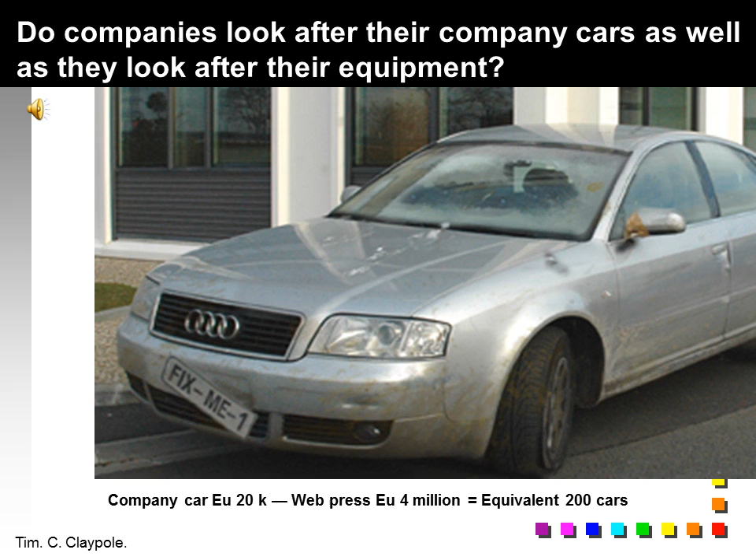This presentation talks about maintenance. Maintenance is an essential thing in terms of achieving productivity in the workplace.

If you look at this mocked up picture of a company car, if you get a company car when you graduate and it's in this condition, it's pretty obvious that you're not doing any maintenance. So what about the equipment? It's not so obvious a lot of the time. In fact, a lot of the Japanese philosophies say the first thing that you do is clean the equipment so you can see the faults. Why is it surprising? A company car is only 20k, whereas a web press or a big piece of capital plant can be millions.

Throughout this presentation, the examples will tend to be drawn from the printing industry. The reason for that is we were commissioned a couple of years ago to do a survey of maintenance in small businesses and large businesses involved in the printing industry.

So why should you want to maintain? Well, you want to maintain because you want things to be available and you want things to be reliable. If your car was badly maintained, you'd have a trauma every time you wanted to start the car on a cold winter's morning.

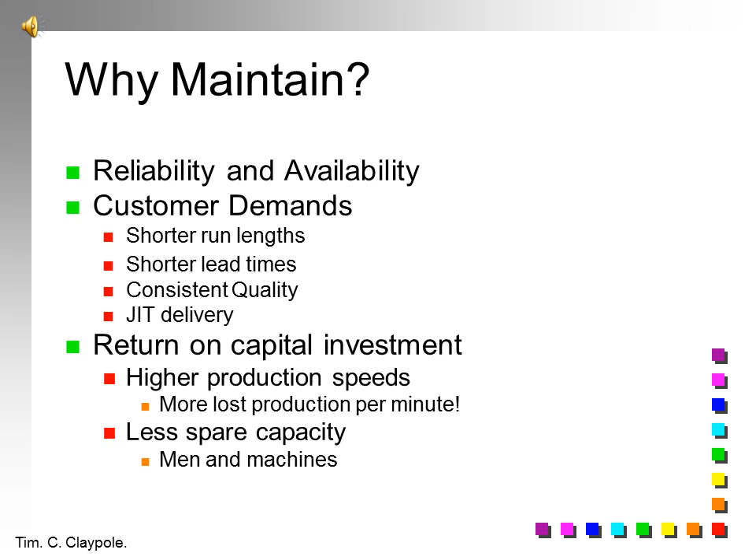Without a maintenance strategy, companies go into the spiral of breakdown despair. They lose production because of breakdowns and because they can't run their equipment as fast as they would have designed to run it. So because of that, they're not meeting customer deadlines.

So they have to run their equipment harder to recover lost time. By running it harder doesn't mean they're running it faster, they've got to run it for longer hours. Because it's still not being maintained, you move to position 3 on the spiral of despair, where breakdowns increase because the thing isn't being maintained, and more time is lost.

Because more time is lost, we've lost more productivity, we've lost more production, there is more pressure to get the jobs out, and we spiral down in step 4 to a point where there is less time available for maintenance. Ultimately, the plant will spiral down to a point at which it doesn't work at all and the whole production ceases.

If you're in the position where you have a car that you need every day, and because you need it every day you haven't got time to maintain it, eventually you reach the point where your car is unavailable because it breaks down catastrophically.

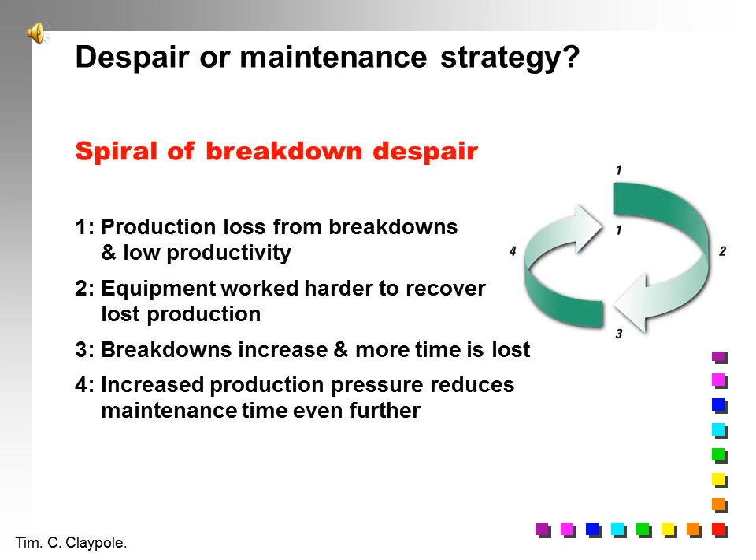How important is maintenance? A survey a few years ago estimated that the total cost of maintenance in the EU approached 5% of the total manufacturing turnover. That's equivalent to the total annual industrial output of Holland. It's a big and important aspect of engineering.

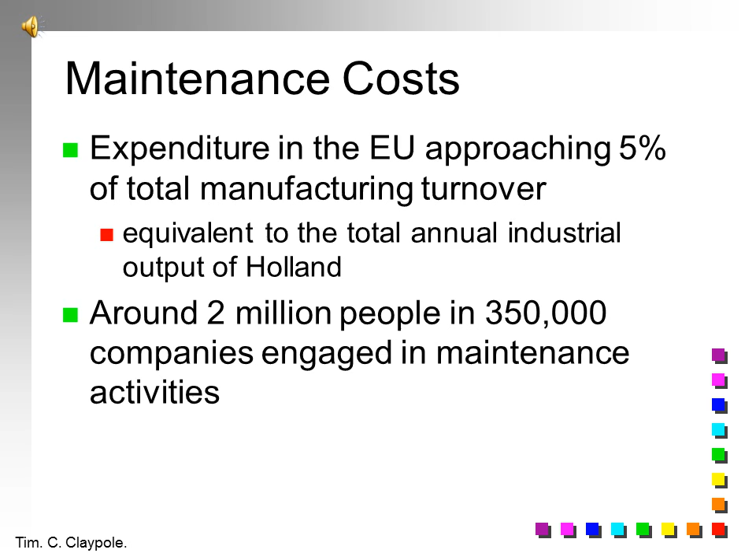There are around 2 million people in 350,000 companies engaged in maintenance activities. But as we'll see from the study that we'll show later, they do not necessarily class themselves as being in maintenance. It is just one of the tasks that they do.

We spend a lot of time teaching you how to design properly, but 70% of diesel engine failures are due to contamination, and 50% are due to wear and wear-related issues, i.e. not maintaining your equipment properly.

40% of rolling element bearings fail because they use the wrong lubricant. Only 10% fail because they got the design wrong. So we're looking at an issue which has a big impact on the things that you will be designing.

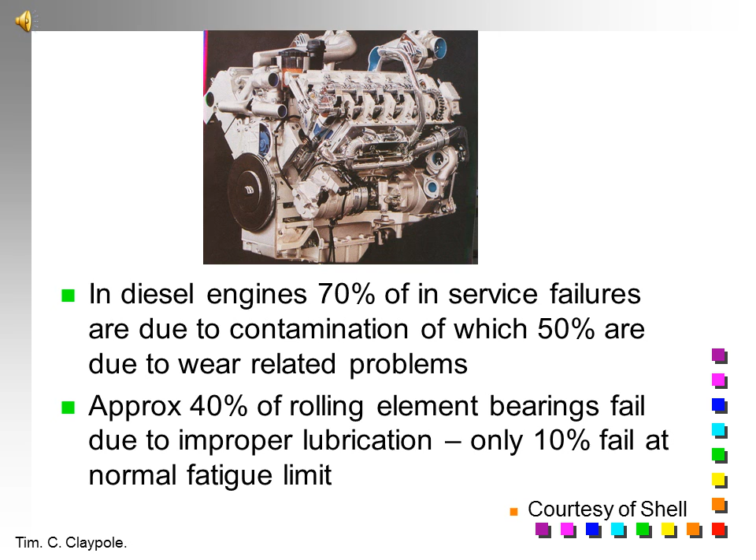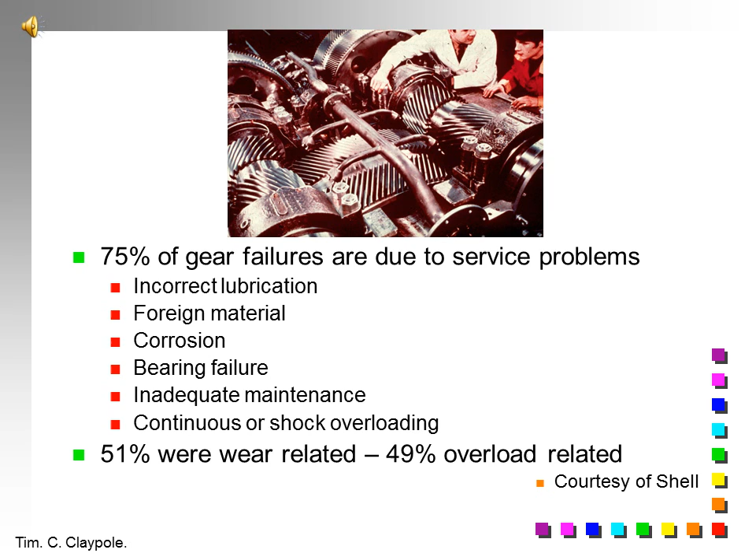If you look at gearboxes, 75% of gear failures are due to service problems. And if you look at the first 5 of these, incorrect lubrication, foreign materials, these are maintenance issues and not monitoring the performance of the gearbox. So in fact 51% of the failures are related to wear and 49% are related to overloading. So the big problem is not that we overload the gearbox, but we don't maintain it properly.

Of course, one of the interesting things is, what is a failure? A failure is different things to different people. One man's failure is another man's inconvenience.

If a gearbox operating in a continuous process plant production line fails or shows signs of failing, if the safety office are involved, they would call for an immediate shutdown because the plant isn't working perfectly. If the production manager is involved, he's being pressurised by the people in sales saying, you've got to get this production out, and by the senior management, he'll say, it's still running, let's leave it run, and we can inspect it the next time we have a shutdown.

The sensible way of doing it, if you have somebody who's looking at the maintenance issues, is you stop the gearbox, you stop the production line, you inspect to see what's happening, and then you monitor to see if it gets worse. And then on the basis of the inspection and the monitoring, decide when it's going to be dealt with.

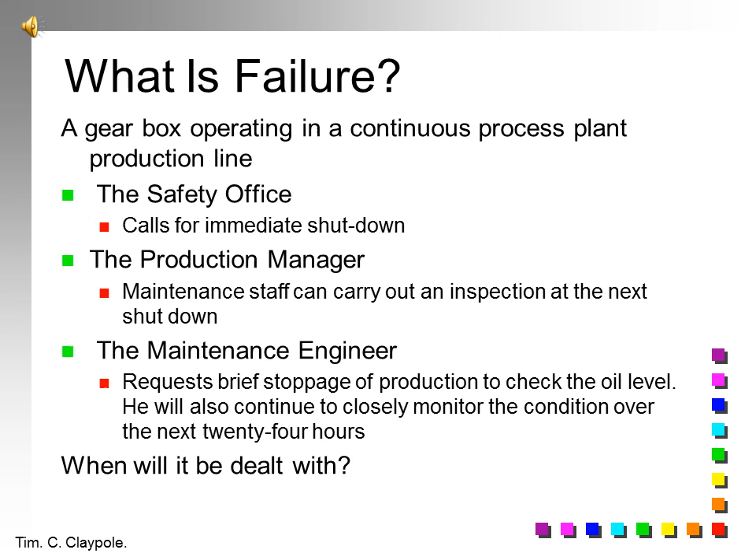The history of maintenance very much parallels what goes on in the National Health Service. In the 1930s, we used to have breakdown maintenance. If you had a heart attack, then they'd try and recover it after the event. If you had something go wrong with you, you'd end up having surgery.

In the 1950s, people started thinking about preventative maintenance. In terms of the heart, preventative maintenance could be having bypass surgery so that you have a good blood flow to the heart muscles so that you don't have the heart attack. This is the same as periodic component replacement.

In the 1970s, you started to look at predictive maintenance. We're now starting to look at disease detection. Is something going wrong ahead of time? Monitoring blood pressure on a regular basis, for example. This is condition monitoring, identifying that something is failing and fixing it before it fails catastrophically.

Finally, in the 1980s, we get proactive. You start looking at cholesterol and blood pressure monitoring, the root cause being diet and diet control, so people start looking at what they eat. A tremendous amount of studies are published all the time about what things are good for you and what things are not good for you. This is the same as performance monitoring, contamination control, total productive maintenance.

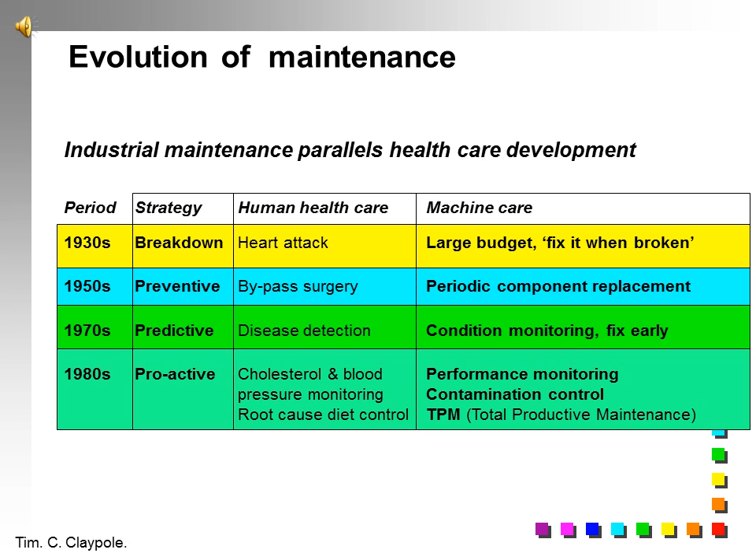What are the maintenance strategies we have available to us? The first and most basic is breakdown maintenance. Breakdown maintenance is we let the plant run, and when it breaks down we fix it.

The second strategy is restorative. This used to be very popular. Once a year or once every 6 months, the equipment is taken out of service and is completely restored to as-new conditions.

The other maintenance strategy is preventative maintenance. You change something ahead of time before you know it's going to fail. A lot of effort's been put into that area to predict failures and therefore be able to estimate when you need to change things. The most common example you'll find of preventative maintenance is changing the oil and the oil filter in your car.

We'll then move on to condition monitoring. Condition monitoring looks at measuring the performance of the item and looking at how that is changing. Formula One do it all the time. They are effectively doing condition monitoring on their car all the time it goes around the circuit. Not every company's got the same budget as a Formula One racing team, but it's still an important way of ensuring you get high availability.

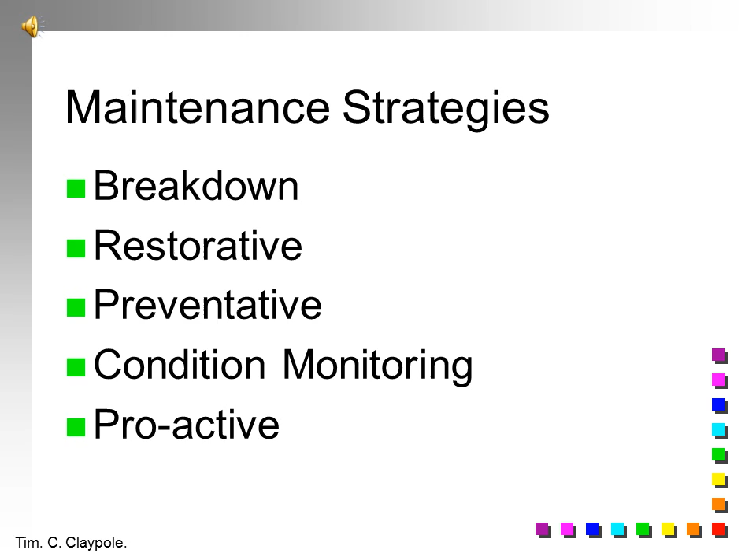And the final maintenance strategy is proactive. Now I'm going to go through these in a bit more detail.

But first, how do you decide what strategy you should adopt? Well, it depends on how long you expect the components to last and how long you expect the plant to last. It depends on what effect the failure will have on the process. Will it cause the process to stop completely? It also depends on whether it's detectable. Are you aware before it's too late that the process has failed?

A good example is car brakes. You need to know the car brakes have failed before you put your foot on the brake, not when you put your foot on the brake.

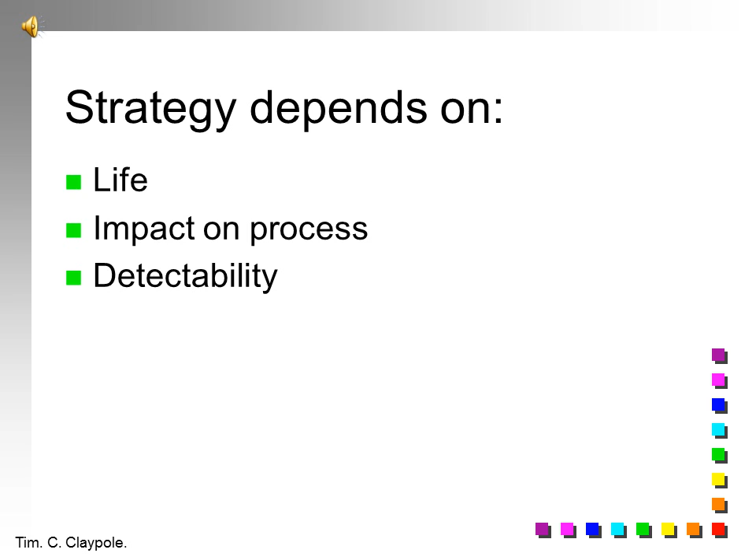So what are failure consequences? What are hidden failures? Hidden failures are failures that are not apparent to the operator. Think again of the car brake. If the car brake fails, it's not immediately apparent. You could belt down the motorway at 100 kilometres an hour, 70 miles an hour, and be totally unaware that your brakes are not going to work. So that's a hidden failure.

The first time you become aware of the failure is when you come to the end of the motorway and you can't stop.

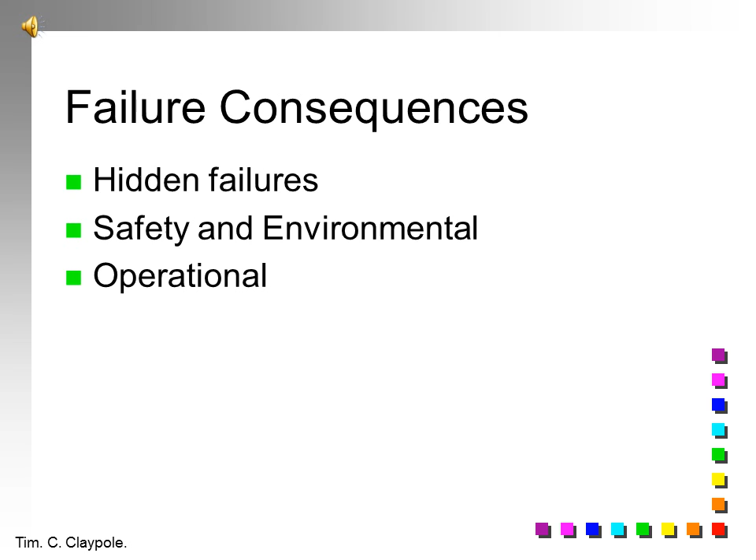What about safety and environmental consequences? So hidden failures are things that the operator can't see. What about safety and environmental? Well, if something fails, does it make the system unsafe? Or in today's climate, does it cause you to have an environmental problem, discharging some smelly liquid into a site of special scientific interest? And finally, the economic one, operationally.

So it hasn't actually caused any harm. But because it's not working, you're exposed to the risk that if there is a fire, you won't be made aware of it. So in itself it's harmless. It doesn't matter to you whether the fire alarm works or not, because it doesn't affect your day-to-day living. But it leaves you exposed to a catastrophic fire where you don't detect it. In which case, you've got to eliminate the risk.

You eliminate the risk with a fire alarm by pressing the button on the detector to make sure that the battery is okay. You blow candle smoke into it to make sure it sounds off, or you burn the toast, which has much the same effect.

What if the failure is hidden and doesn't have a consequence? Then you've got to ask, what on earth is that piece of equipment there for anyway? It might seem a statement of the obvious, but it happens quite often in industrial plants. They rebuild the plant, they redesign the system, and they leave old bits in place which are still working, but they don't actually affect anything. So you actually have to look at it and think, well, if it's not having any effect on the process and it doesn't affect safety or anything like that, why in fact have we still got this piece of equipment?

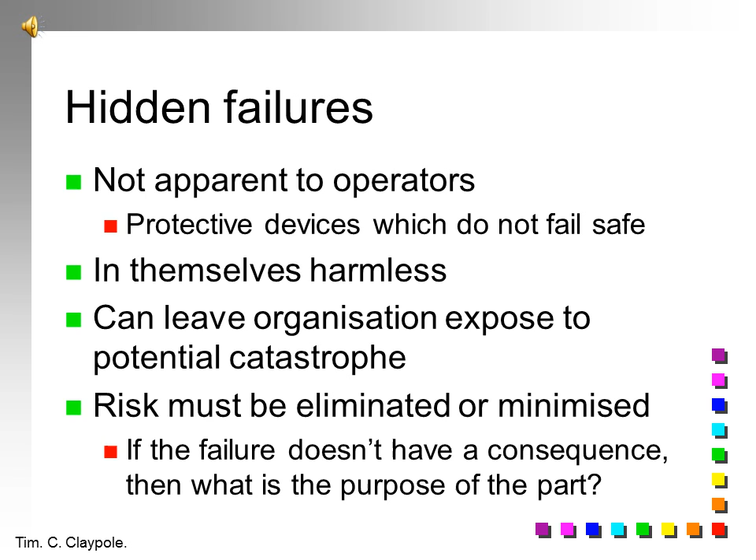Safety and environment are the most important. If we had the failure, does it kill someone? Will it cause a serious injury? Will it let something that damages the environment? If the answer to either of those questions is yes, then you cannot risk having that type of failure. You've got to look at the design, redesign the process, and eliminate it or minimize the risk.

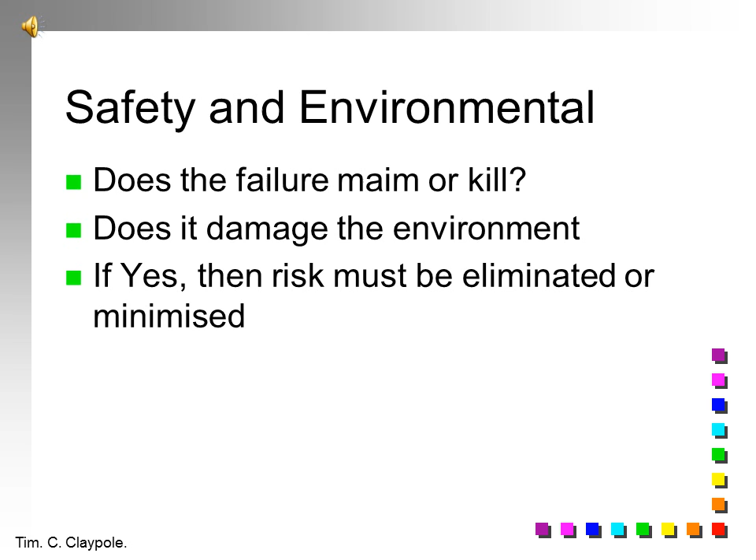A lot of the time, though, we're dealing with maintenance and we're looking at the operational consequences. What maintenance strategy we're going to adopt depends on how it impacts on the productivity and the ability of the company to make money. The economic decision is made by, does it reduce the availability so you lose productivity? Does it impact on the quality of the goods that you can produce? A good example of that, if you work in a clean room, you need to maintain the filters, because if you don't maintain the filters, the room doesn't maintain its clean room standard, and you end up getting dirt in the components that you're manufacturing. Does it create a loss of service? By a loss of service, it means, is it something that's not available, you're not able to deliver?

There are some non-operational consequences. If you look at, for example, a pump failure, if you have a pump failure, a standby takes over straight away. In oil refineries, there's quite often a backup pump system. Then you have to ask the question, if the pump fails, how long does it take to repair? And while this pump is being repaired, are you exposed to a risk that the second pump will fail? And how long is it acceptable to be exposed to that risk? And what would you do if you do have the second pump fail?

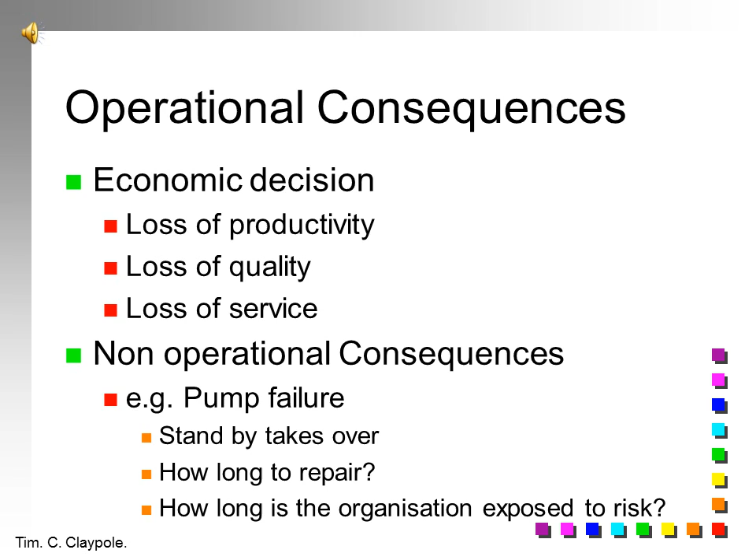So now we're going to look at the different strategies. What's breakdown maintenance? Breakdown maintenance is when something fails, we fix it. The most basic example of that is the light bulb. If you're in the house, you wouldn't change your light bulb until it goes out, because there's no point in changing it before then. You want to get it to last as long as possible.

Doesn't need any planning. The only planning you have to do is make sure you've got a bulb, and make sure that somebody is there who's capable of changing it.

If you have breakdown maintenance, there must be no health and safety implications. How could a bulb have health and safety implications? Well, if it was in a dark coal cellar or on a dark set of steps and the bulb went out, you might have no lights that would enable you to see up and down the steps, so people are put at risk.

How long does it take to repair? Do you have to have it fixed straight away? In which case you might just have to wait, get a bulb from your cupboard and put it in the holder, or can you actually afford to wait until you can go down the shops and buy another one? So breakdown maintenance, replacing things when they break.

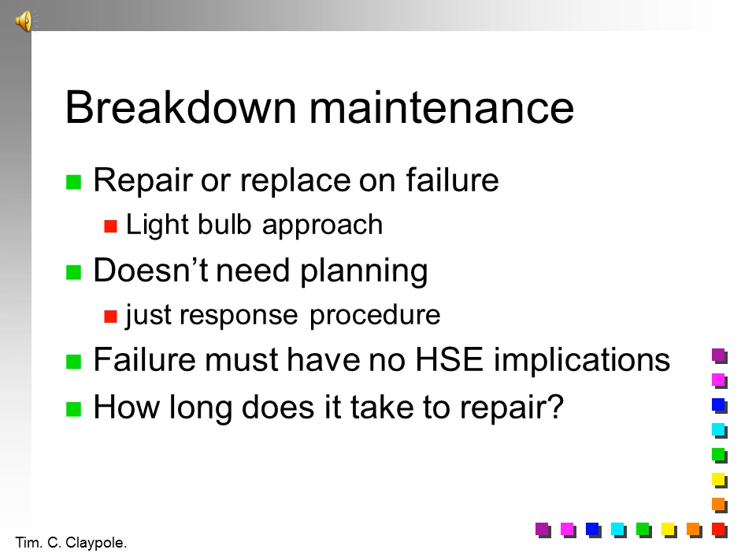What's the cost? There's a cost to everything. You have a loss of availability. You have all these lights in the house because you want them to be lit like that. You either lose the availability when the bulbs go out, or you maintain a surplus capacity - that is, more bulbs there than you actually need.

You have a high spares inventory or long downtime. Well, do you keep a bulb in the cupboard, or do you have to wait till you go down the shops? You need to maintain a breakdown crew.

Well, most people, I would guess here, could change a light bulb. But if it was my elderly mother, she would have to wait till one of her younger relatives came in to change the light bulb. They would be the maintenance crew, the breakdown crew, or an external contractor.

So a company has a choice. Do we have a maintenance crew on site all the time who are sat around doing nothing most of the time because they are waiting for the breakdown to occur, or do we wait until we call in enough people to fix a serious breakdown?

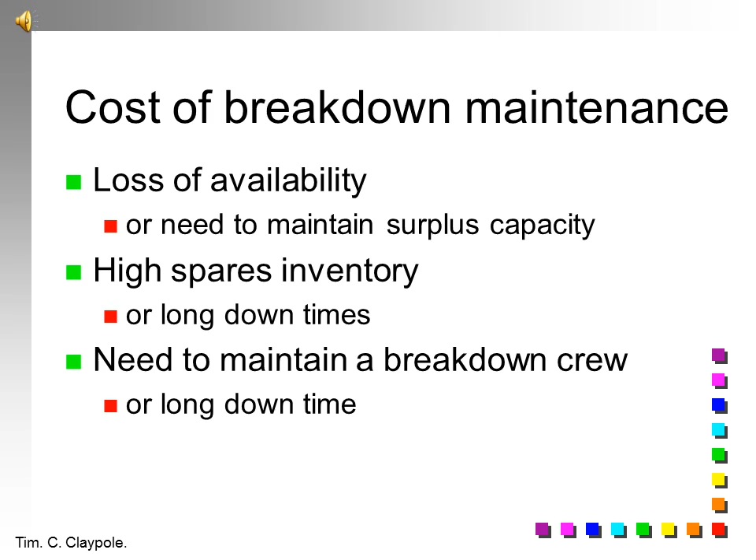An alternative to breakdown maintenance is preventative maintenance. In preventative maintenance, you change components before they fail. Good example: changing the oil and the filter in your car. You can plan the shutdown to do it - I'm going to change the oil in my car, I will change it this weekend. So you can integrate it easily into the work schedules.

You can avoid breakdowns provided you have the interval between the component replacement correctly calculated. That is, that you know that the component is likely to last longer than the interval that you've allowed for changing the oil.

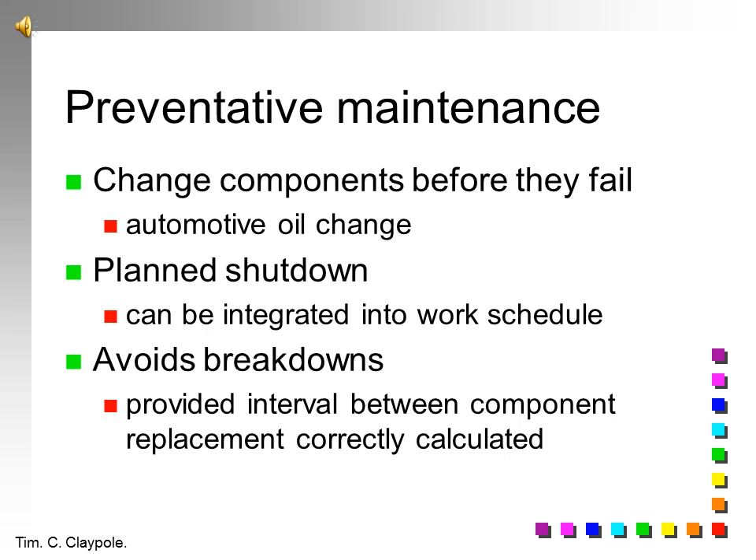It assumes that there's age-related failure - that as a component gets older, it's more likely to fail. You start off with initial performance, which has to exceed the desired performance, or else you've got a failure before you start, and that's a design issue. As time goes on, the performance of the system deteriorates until eventually you reach a failure. The idea is that with preventative maintenance, we change the components before you reach this failure point.

It's very popular with academics because there's a lot of effort put into forecasting when this failure point will occur, and it becomes quite popular with maintenance engineers because there's a whole raft of strategies they can talk about in terms of failure and predicting the point of failure.

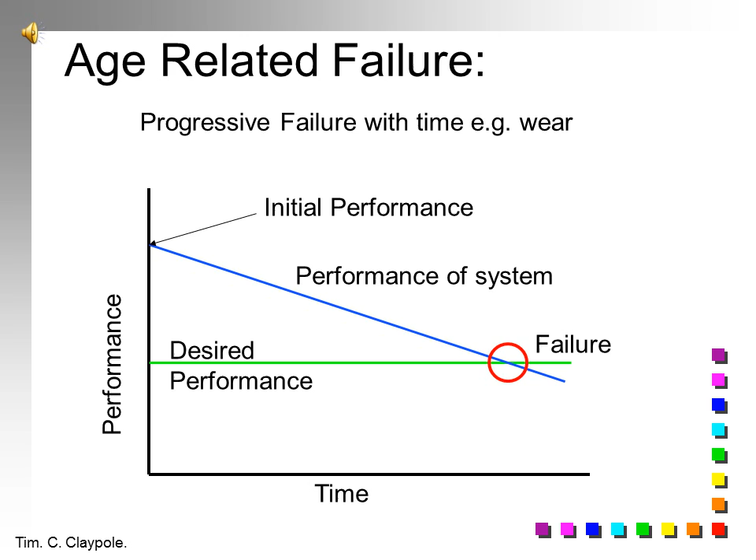So what's the cost of preventative maintenance? You never achieve the full life of the components - you are, by definition, changing them before they fail. If you frequently replace components, you're throwing money away. It also may not improve the reliability.

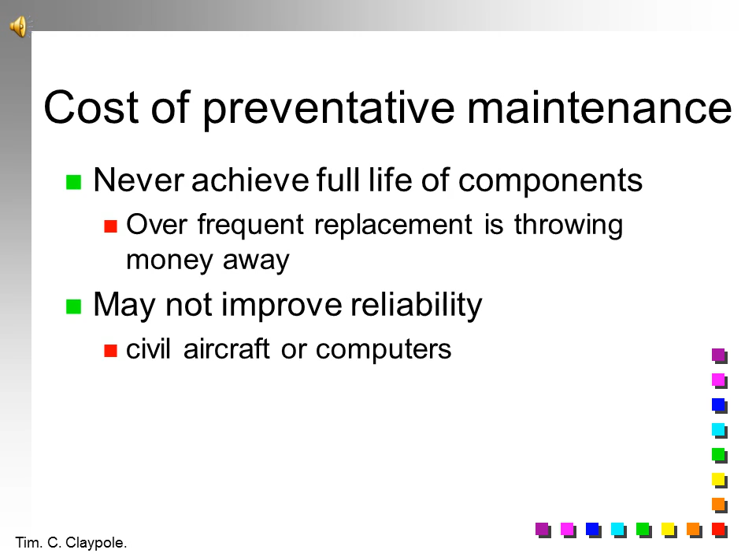If we look at the probability of failure, the traditional time-related, age-related failure suggests that you have a period of run-in, called infant mortality. There's a lot of synergies drawn with the way in which the human body behaves, so when things are young, they tend to fail. Then you have a period of almost constant failure, where you have the odd failure due to unforeseen circumstances. And then at the end, in stage 3, you have increasing failure.

So provided you can predict when this transition from stage 2 to stage 3 occurs, you can predict when you should do your preventative maintenance.

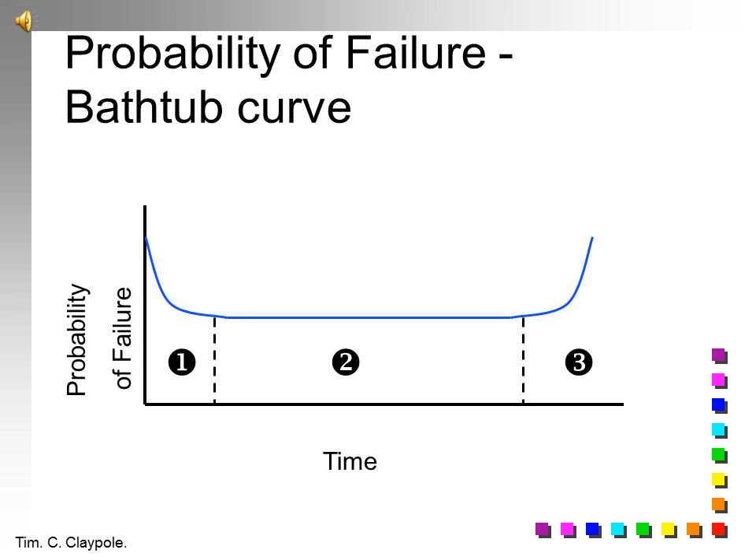This slide sums up what I just said in that last bit. The initial failures, constant risk, rises generally slightly. It's the normal operating region. You have the initial failures, quite often described as burn-in.

When you used to have a car, you used to have a period of running in. In fact, in the 1940s, 1930s, they would have a running-in oil, and I think that went on right up into the 1960s, because this is the time when most failures are likely to occur. And then you have the wear-out region, which is when you need to replace.

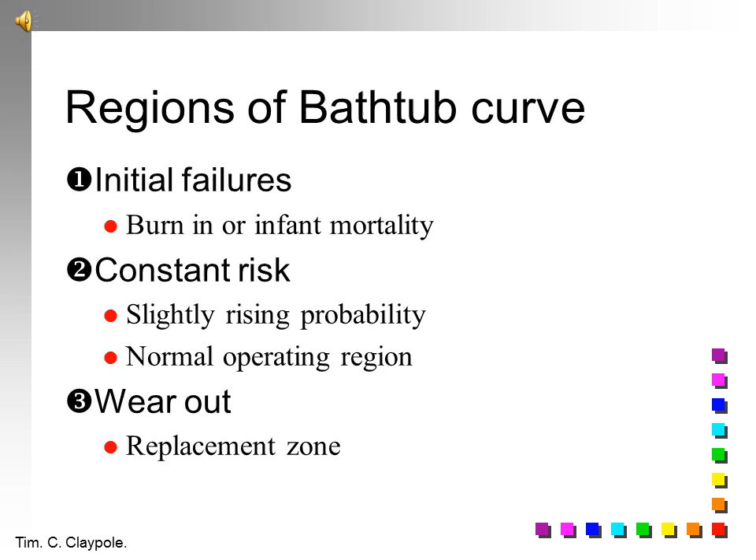In civil aircraft, 4% of components follow the bathtub curve, and 2% follow the bathtub curve without the burn-in section. 5% follow section 2 only, with a steady increase of failure. The significant thing is that only 11% of components in a civil aircraft show age-related failure. So replacing it at a predetermined interval is probably not good news if you're flying.

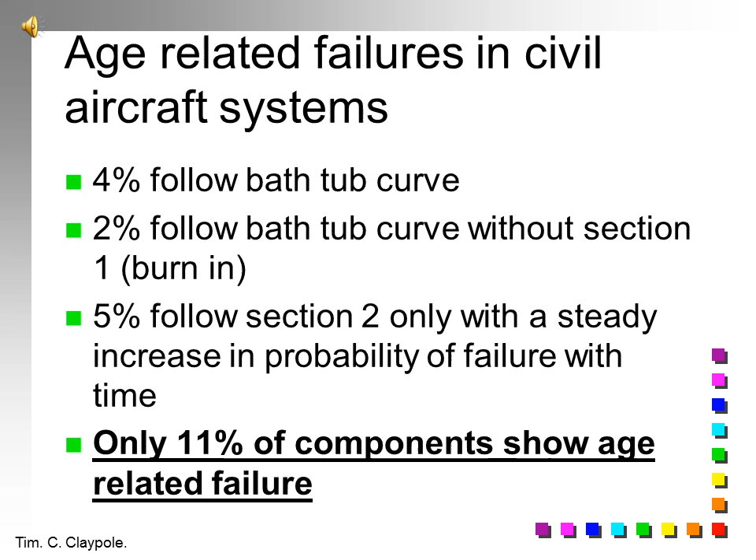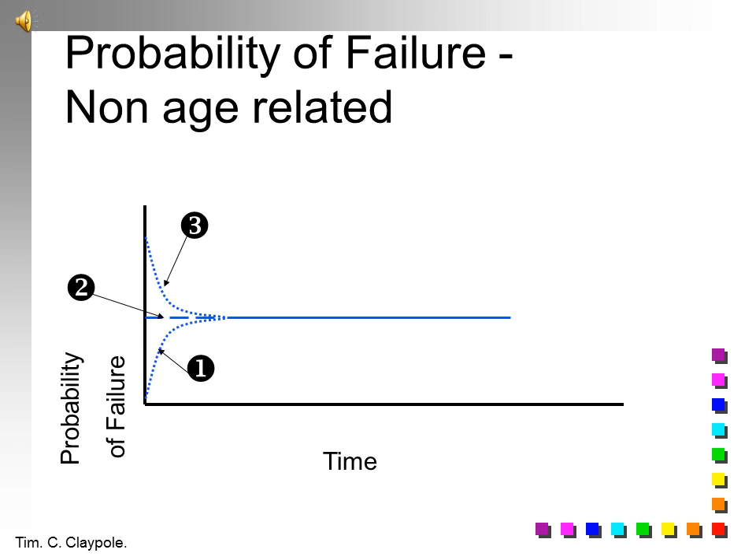So if it's not an age-related failure, how do non-age-related failures look? These show a basic constant failure with time, and there are three ways it gets to that constant failure. It could start at constant failure and run at a constant rate all the way through. It could rise up to a constant failure after a period of running in. Or it could fall to that - infant mortality again.

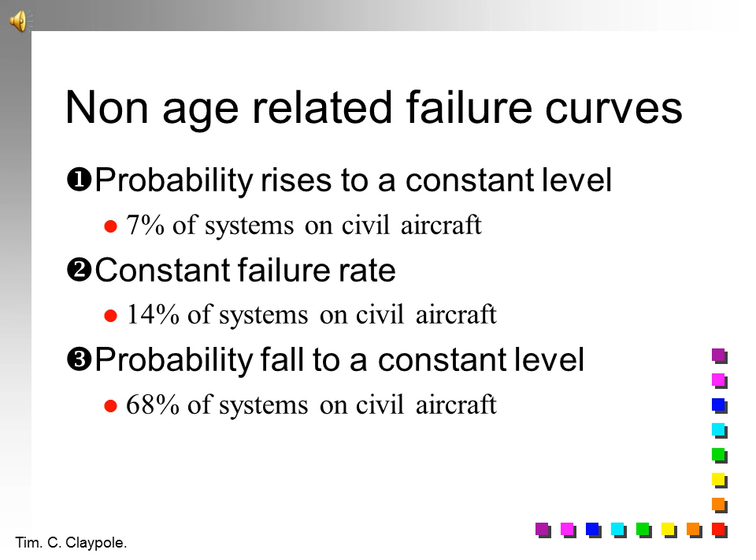So how do these non-age related failures look for civil aircraft? The probability of rising to a constant level is 7%. Constant failure rate is 14%. Probability of a fall to a constant level is 68%. So basically, once you have the component in there, the probability of failure is much less once it's been run in. If you tot that up, 89% of components on civil aircraft have non-age-related failures.

So why is this? The first thing is there are multiple modes of failure. If you have a component, it fails when one component inside it fails. So you're looking at a multitude of different failure modes within the individual components of a device. The more complex, the more modes of failure there are.

The classic example of where companies have taken advantage of this is in computers. Computers traditionally follow this curve through - they start off at a high rate of failure, have infant mortality and burn-in, and then fall to a constant low risk.

The people who identified this quite smartly were Dell when they wanted to break into the computer market. When Dell first started selling computers, they used to sell them with a 2-year, 24-hour replacement warranty. How could they afford that when other companies were charging a large amount for that sort of service? Well, they'd worked out that if they ran the computer on the desk for 36 hours before shipping it out, then it would run for 2 years without failing, or there was a good probability it would.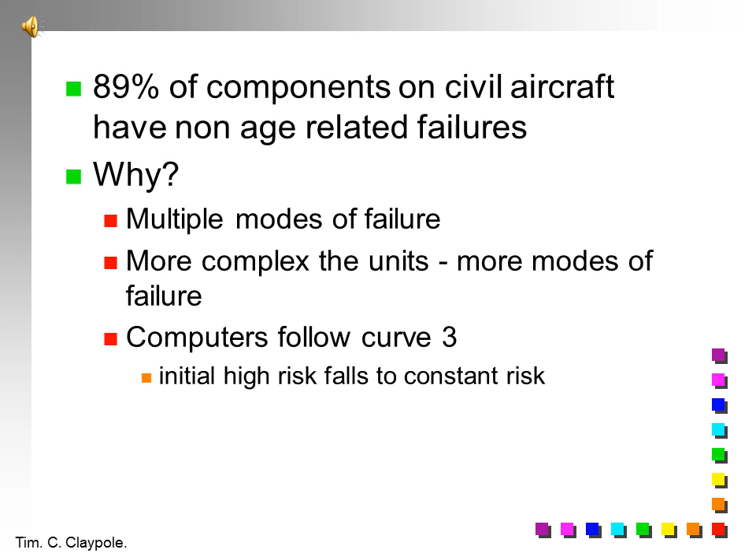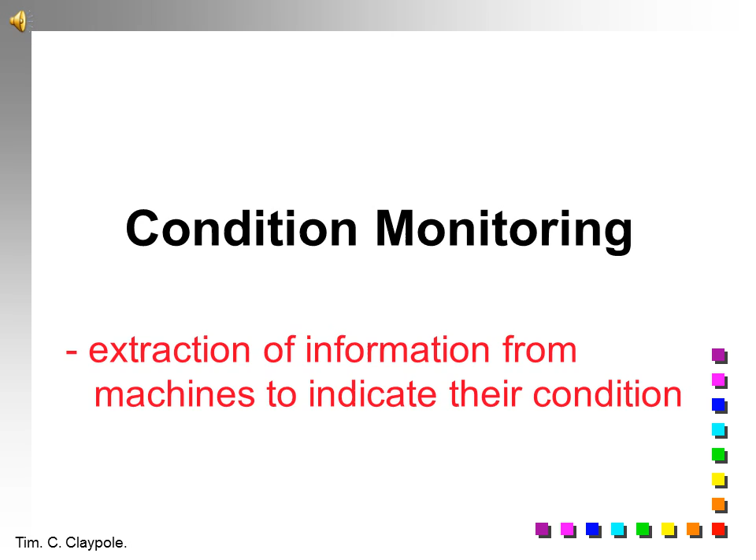So if we can't rely on age, what can we rely on? The alternative is condition monitoring. Condition monitoring is a method of extracting information from machines that can indicate their condition. If you look to the human, you're looking at blood pressure, body temperature, as means of condition monitoring.

With condition monitoring, we are looking for the onset of failure. We know what the normal operating conditions are. We can be monitoring temperature, vibration, oil condition, or power consumption, and we're looking for a change in those parameters - a change that we know is an indication that failure is on its way.

The critical thing with condition monitoring is identifying the key things we need to measure for any particular piece of equipment, and identifying how long it is between realizing that a failure is going to occur and the failure actually occurring. That sets the interval at which you have to do this condition monitoring, and it also sets the interval as to how fast you have to respond. There's no point knowing something is going to fail and then responding so slowly that you get breakdown - you may as well not bother with condition monitoring at all and just have breakdown maintenance.

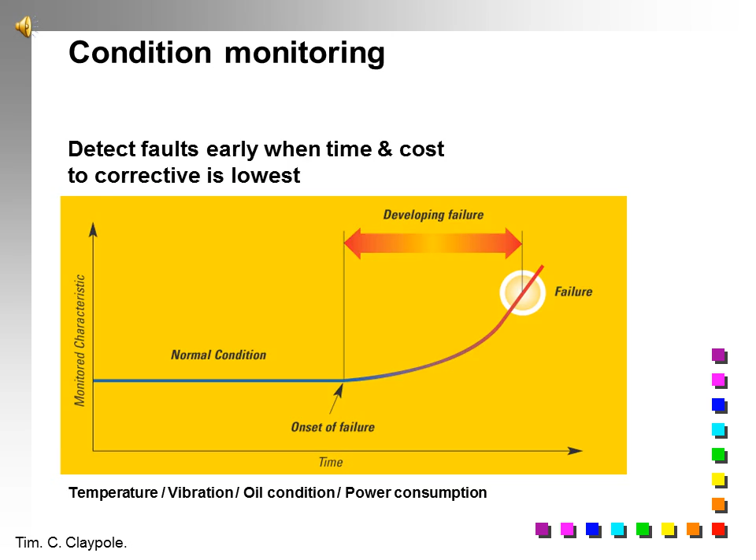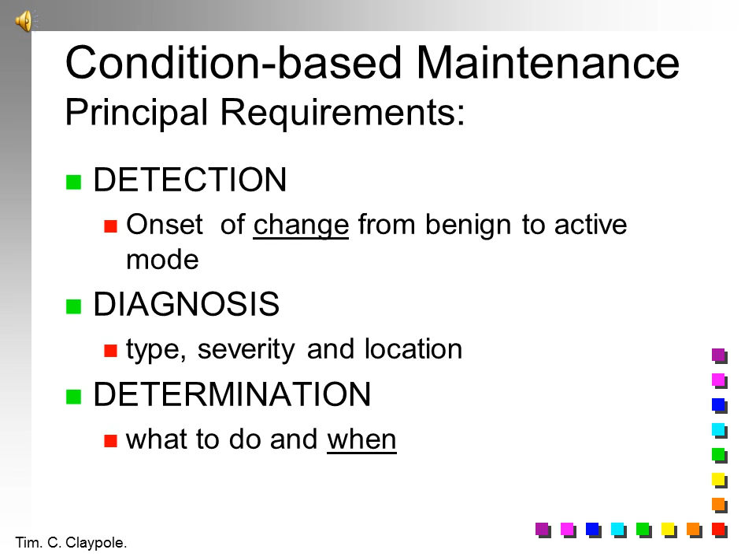So, principal requirements of condition monitoring: we need to know how to detect the onset of change from a benign mode, when things are happening and just drifting about all the time, into an active failure mode. We need to be able to work out from that how severe it's going to be, where it's located, and how fast it's going to occur. And from that we can decide what we're going to do.

So what are the basic methods of condition monitoring? The most basic of all is performance monitoring. You monitor how much energy is going into a piece of equipment to see whether it's absorbing more, because as things wear down they might start to rub a bit more, so they absorb more power. You look at the quality of the products coming out, start looking at your SPC data, or look at the actual power output.

So that's all performance monitoring - things perhaps you should be doing, but looking for trends to indicate when you should be doing maintenance. The most popular in the condition monitoring armoury is vibration monitoring: putting sensors on and looking at how the vibration is changing with time for indications of failure.

You're actually all equipped with vibration monitors. You listen to the sounds of things, and you feel vibration in things as you're driving along. When you're used to operating or driving something, you become acutely aware of when there's a change in the frequency, in the note of the vibration, because that might indicate there's a failure about to occur.

For my sins, I've driven a Lotus for many years - lots of trouble, usually serious. You get used to listening for the wheel bearing failing, because it has a tendency to fail, and the universal joints too. You know when the vibration is occurring, and you know you've got to do some routine maintenance, or else you're going to have an expensive garage repair.

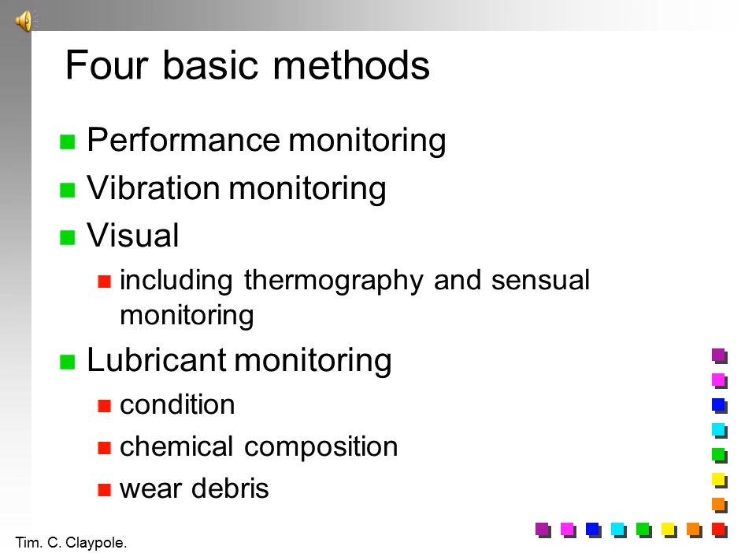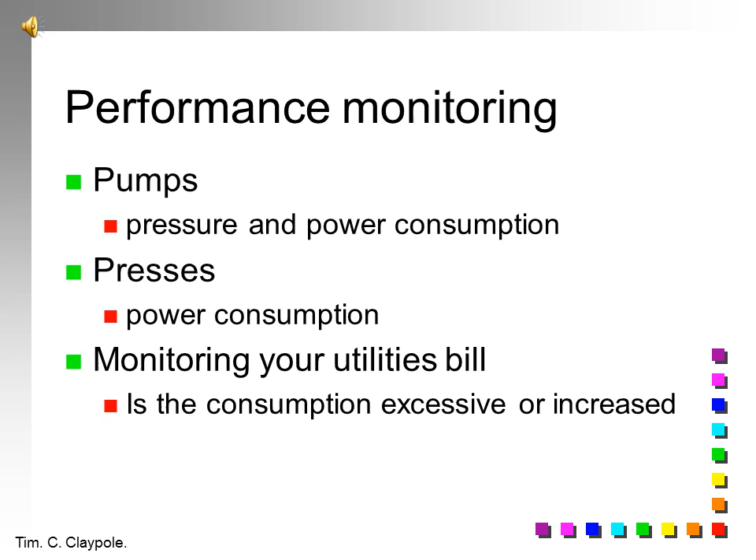So, performance monitoring - what sort of things can we monitor? For pumps, we can look at the pressure they deliver and the power they consume. If we're looking at presses and rolling mills, it's again power consumption. And the other most important thing is the bill from your gas and electricity suppliers - do you suddenly get a rapid increase? That can indicate that something is going wrong.

Vibration monitoring gives you a number of key issues and different signals dependent on the type and frequency of the signal you have. If you're looking at a shaft, a misalignment occurs with a peak where the frequency corresponds to the shaft speed. If something is loose, it can appear at 1, 2 or 3 times the shaft speed. If you have imbalance, it has a peak at the shaft speed.

Gear damage happens at the meshing frequency - as every tooth comes together, they hit each other. If there's damage, it occurs on a cyclic basis.

If you have oil whirl, which occurs in bearings, you can get it at a fraction of the shaft speed. With rolling element failures, like in ball bearings or roller bearings, you get a much higher frequency, because the rollers are going round, and if one of them is damaged it gives a spike of high-frequency noise, since they're rotating much faster than the shaft.

Now, the analysis of vibration is a specialist topic, which we again used to specialise in here at this university. You will still see evidence of that in some of the experiments you've done over the years.

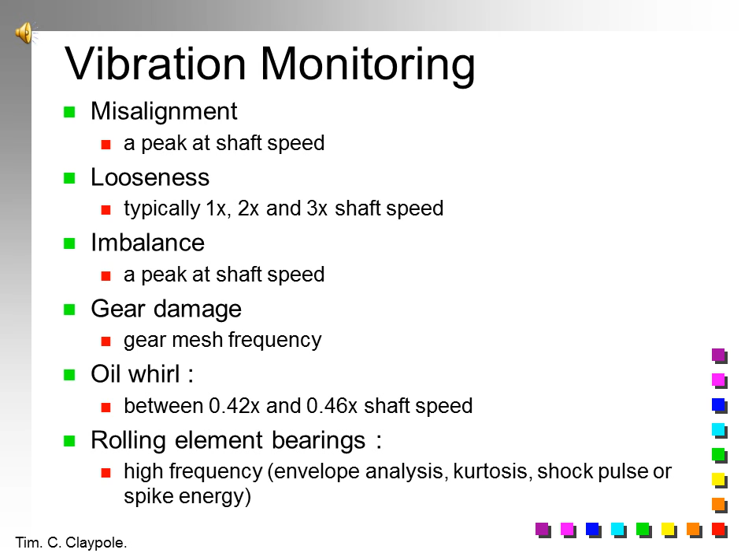Thermal imaging - if you use a thermal imaging camera, you can look to see whether there are hot spots. You're looking for hot bearings, systems that are about to fail.

We were involved in a project about getting a measure of hot bearings as they pass the set point, so you could monitor if the bearings were going to fail in a goods train. Why would you want to do that? Well, if the bearing fails in the middle of the Channel Tunnel, it's a long way to drag the train out. So they were looking at a way of monitoring the temperature of the bearing housings.

The reason we were involved was because they wanted to move the bearing houses from outboard, where you could easily put a temperature detector on them, to inboard, because it made the construction of the rolling stock easier. But that meant you couldn't see the bearing housing, so we were looking at a way of optically getting in to see the bearing houses.

Another critical application - you'll see them flying helicopters with thermal imaging, looking down power cables, because you can start to see where short circuits are occurring and where insulators are starting to break down as they get hotter. We also look at any rolling component in a press.

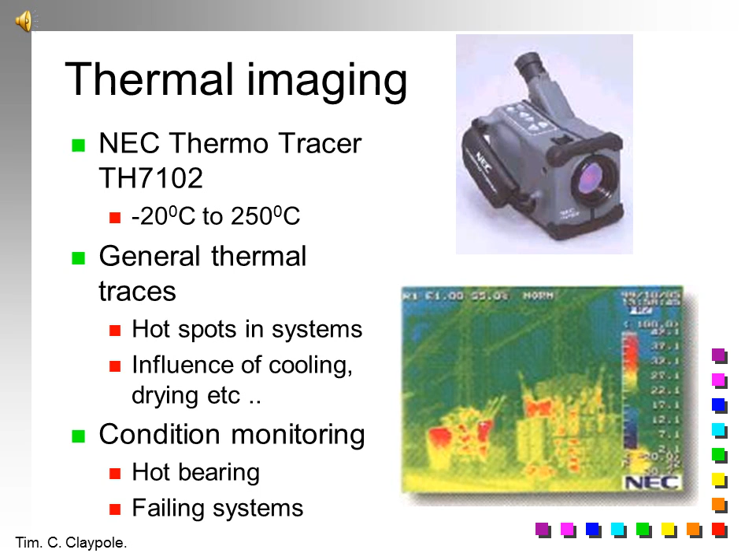The lubricant carries out many roles. It acts as a fluid film holding apart the surfaces under load. It acts as a coolant. It carries away contaminants—if you want to worry about why an oil turns black, it's because it's carrying away the soot contaminants, generally inside the cylinder head in your engine. It acts as a hydraulic medium, developing hydraulic forces to hold the surfaces apart. It also protects against rust and corrosion.

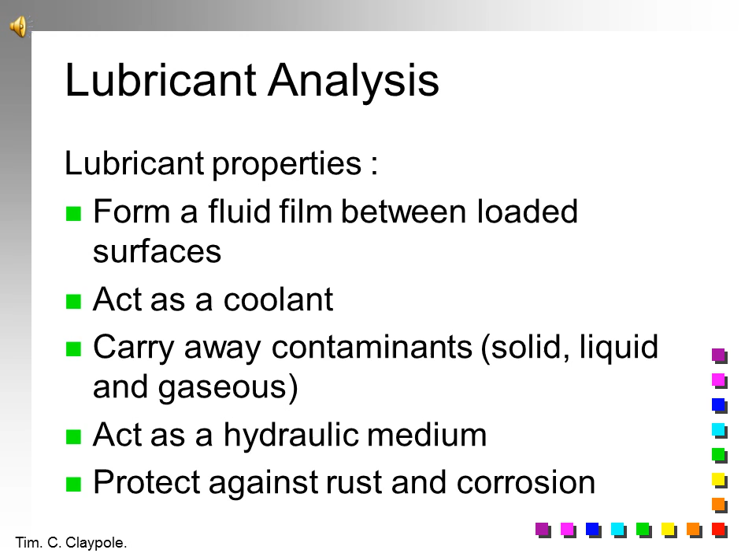So what ways have we got to examine this? The first and most basic is simple sensory tests—by sensory, look at it. If you look at these three examples, on the left is brand new lubricating oil. It's perfectly clear, you can see through it, you can see the line paper behind it. The next sample is one that's been in service—you can see it's picked up a few contaminants and you can't see the lines on the white paper through it. Finally, the sample of a well-used piece of oil, which is black, fully contaminated and looks like it needs to be changed.

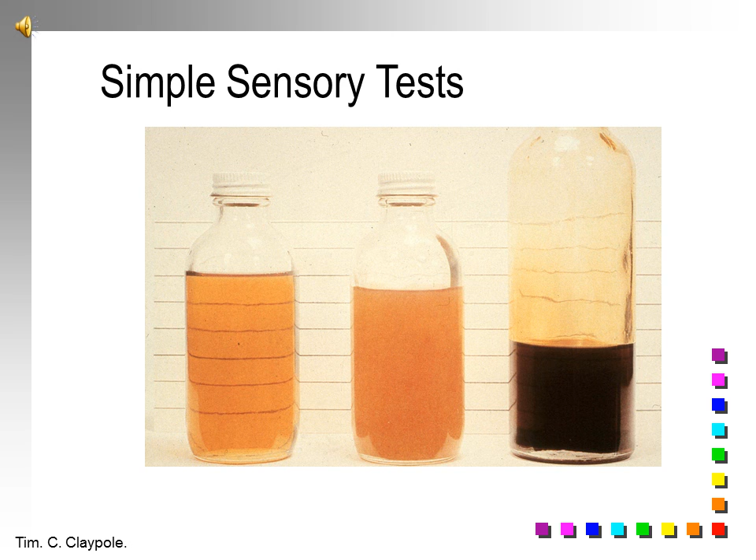The benefits of oil analysis: the US Air Force uses oil analysis to look at serious problems in aircraft components. They reckon it saved them $15 million. The US Navy, on a similar oil analysis program for aircraft systems, reckon that it saved over 178% of the cost of actually doing the oil monitoring.

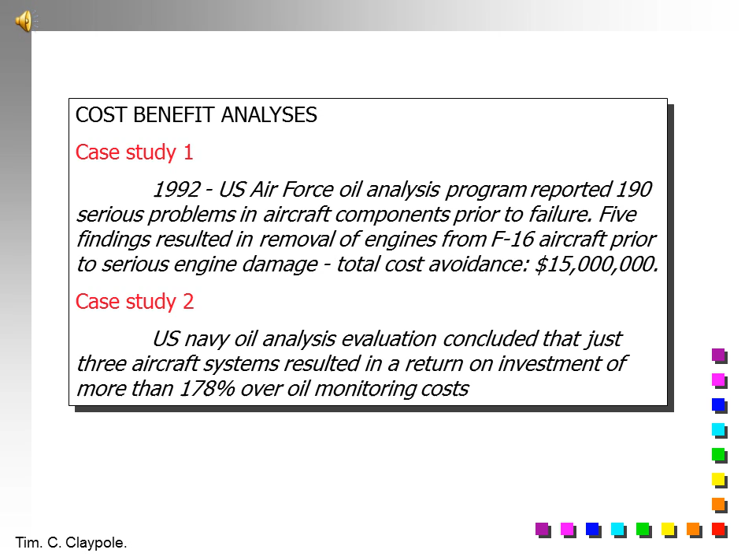When you're looking at oil, you're looking at the wear and the wear particles. What happens is that the wear debris is entrained into the oil and taken away from its site of production. By looking at the shape and size of these wear debris particles, we can identify where the wear came from, and from the chemical composition, exactly where in the engine it occurred, and whether it's a benign problem or something we need to act on immediately.

What we're looking at is the changing size and distribution with time, shown in the diagram in the top right corner. We're looking at the shape, and we're looking at the analysis of the material. The other thing which goes through in the bearings and in the lubricating system is re-entrained debris—that's debris that has got past the filters—and foreign debris, bits that have just got into the oil which shouldn't be there.

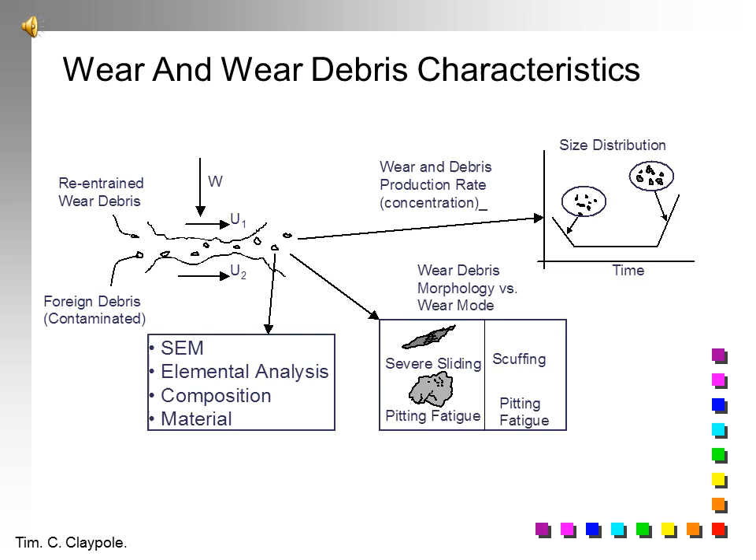An idealized representation of the wear is very similar to the bathtub curve. You have a reactive zone where you're getting the initial wearing off the high peaks in the bearings. You get a proactive zone where you're having benign wear, where the material is suffering age-related wear, and then you have a reactive zone where wear is increasing. Bearing wear and wear of rotating components such as this are one of the few things that follow an age-related curve.

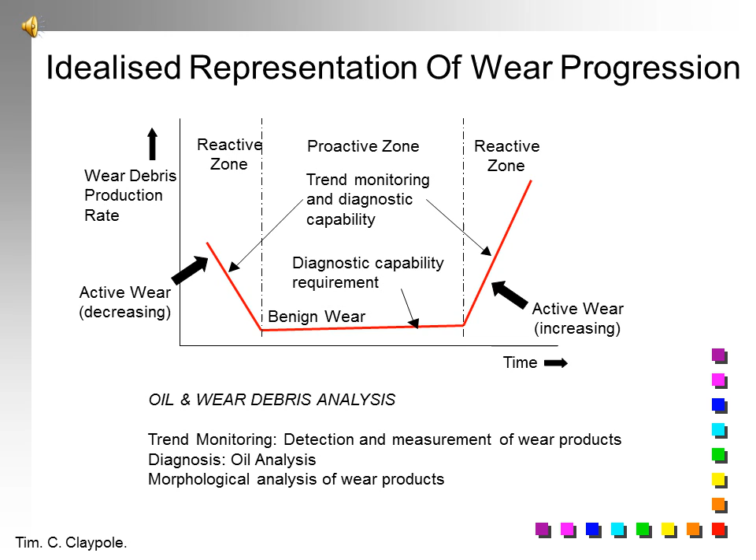There are several ways that we can look at getting the particle features and wear characteristics. Firstly, we can take a regular oil sample and, offline, measure the size and shape of the debris. This gives us more information but isn't instantaneous. Various ways we can take a sample from the filter, we can put a magnetic plug into the bottom of the bearing case. We can also look at online measurements, measuring, say, the transparency of the oil as it's rotating, or monitoring the metallic parts as they're recirculated.

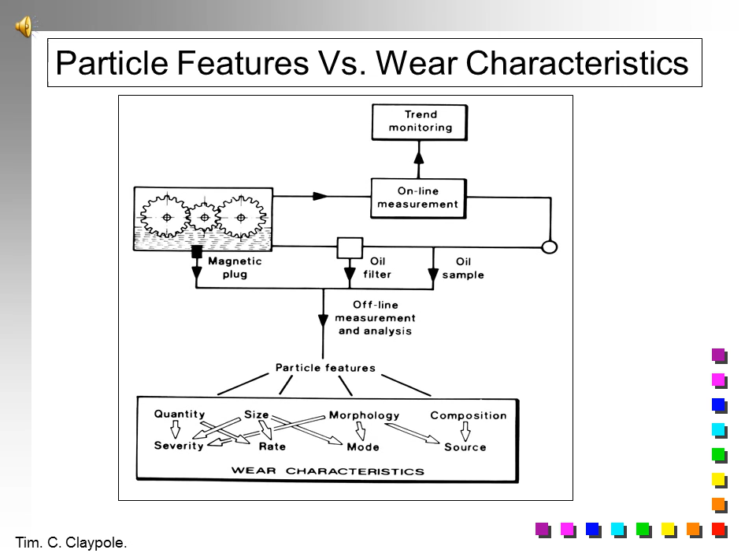Spectrographic oil analysis is about measuring the chemical composition. You can look to see whether the oil is carrying trace elements—it could be carrying copper from a bearing surface, and as the bearing deteriorates, the amount of copper increases. Also, because in most systems the oil will lubricate several surfaces—in a domestic situation, think of the modern car, a lot of the time the oil that does the gearbox also does the engine—you need to identify which component is failing. By doing spectrographic analysis, that is looking at the chemical composition, you can identify which bearing is failing, because each of the bearings has a different chemical composition.

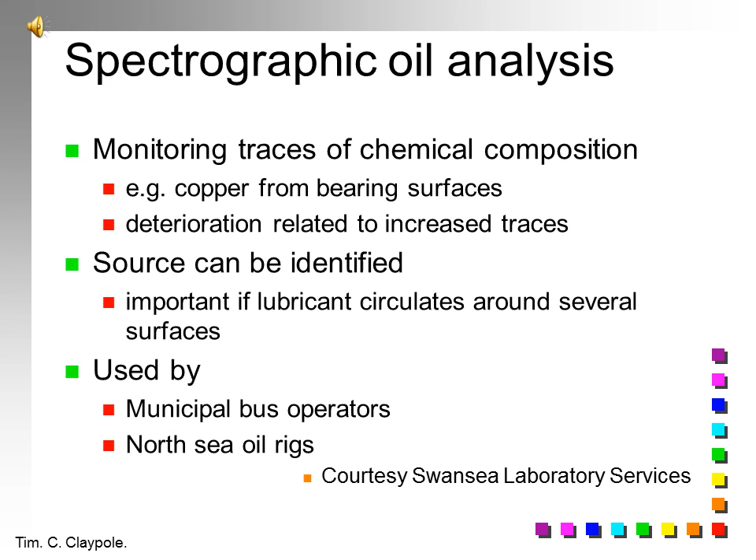Swansea Laboratory Services, which is a spin-out company from Swansea University, has for a long time looked at the London bus fleets to identify and monitor the change in oil compositions, to identify when buses should be taken out of service, and also used extensively on North Sea oil rigs to identify which components are going to fail.

There are several ways of getting at the metallic parts in the oil. One of the most common ones for iron-based debris is to use a magnetic detector plug. If you buy an old Jaguar, you find these come complete with a magnetic detector plug. These hold on to the iron particles or steel particles, and then you can remove them and look for the debris. Other ways are to actually filter and take the debris out.

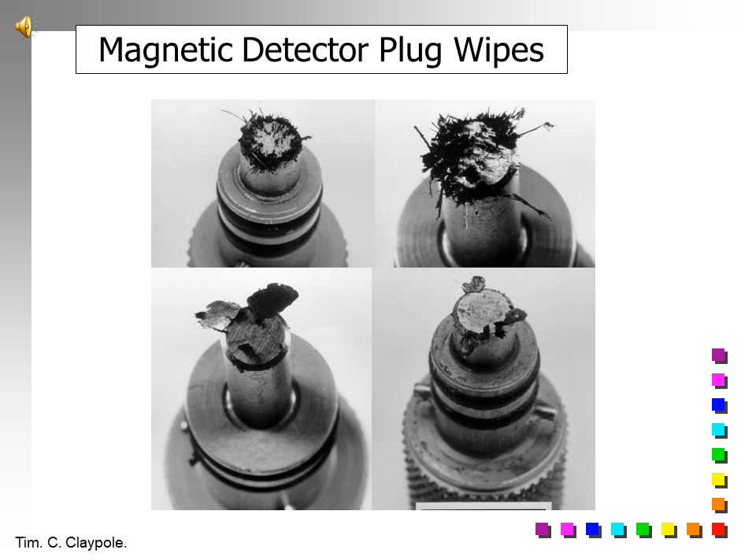If you look at representative debris, this is from a RB 199 engine. Once you extract the debris, you can look at the different types. You can look at benign rubbing wear. This is where components have come off as almost flat platelets because they've rubbed off.

You can have cutting wear. If you can remember back to level 1 when I talked about metal cutting, this is metal cutting on a micro scale, so you have effectively a cut chip.

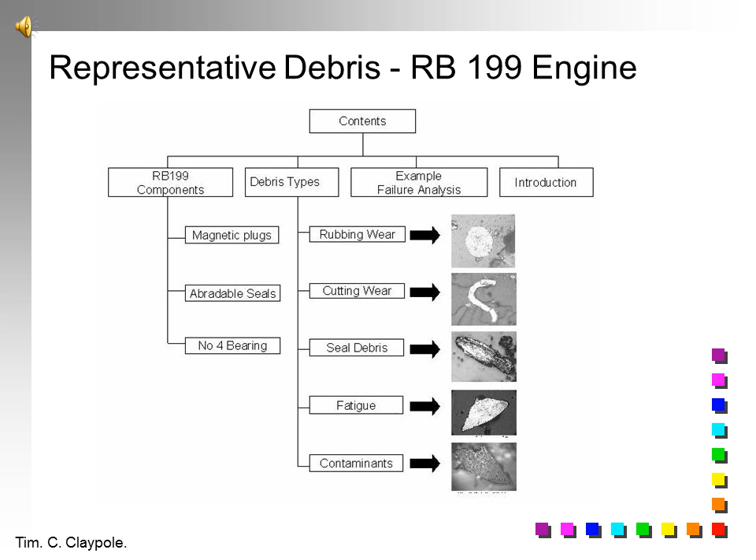You can have seal debris. The seal debris is non-metallic, so it wouldn't come out on a magnetic plug. You can look at fatigue wear. Fatigue is where you have breakup along the grain boundary, so the metal comes out in lumps. And you can look at general contaminants - contaminants and nondescript particles that have just happened to have wandered in there. So by looking at these different types of wear particles, we can identify where the wear is occurring.

This table gives a typical set of examples of the different types of particles and how they would look. We've tried over the years to make it an intelligent system which automatically looks and identifies the different shapes of the particles. But at the moment it's generally proved that human operators are actually more reliable than their image processing equivalents. But in time that may change.

The other thing which you can see in the particles is that when they heat up, for example in a wear particle, they can actually change colour. As you heat steel up, it changes colour. So you might be able to see high temperature wear in some of the particles.

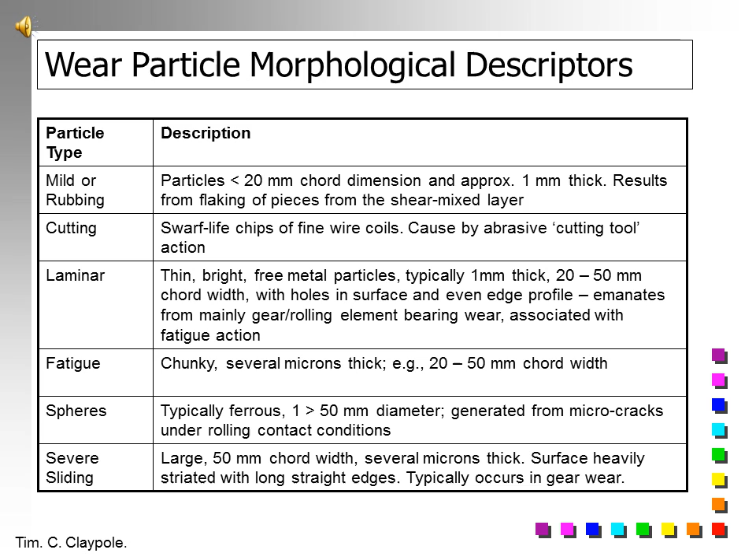So, finished condition monitoring - what about proactive maintenance? Proactive maintenance is similar to failure mode and effect analysis. It's about identifying and eliminating the causes of failure. Instead of monitoring a bearing for failure, if we identified that the failure is caused by the ingress of material, say sand if you're using it in an environment like Swansea Bay, then you could look at how you could stop the particles getting into the bearing and ultimately stop it failing.

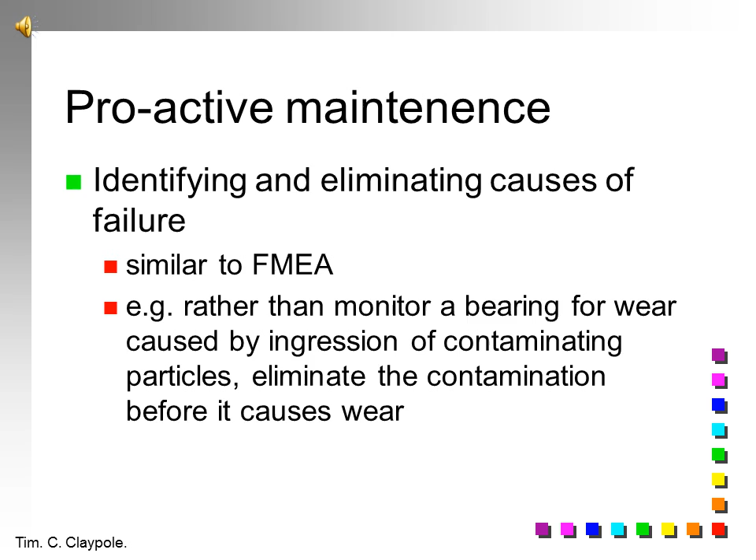So, what's the cost of maintenance? We're looking at the cost of the item and its consequential damage if it fails. What about an unscheduled failure? Well, then you have loss of production. To prevent unscheduled failures or to minimise their effect, you have to have a maintenance team on standby - another cost - or you have to be able to call in a contractor at short notice.

If you replace things early, like you do with periodic replacement, then you're not getting the full life out of the component. You're throwing away components that could still run for another length of time. If you look at condition monitoring, the cost is the cost of equipment, the cost of training, and the cost of establishing these relationships between how much the wear or vibration is taking place, and how long it is between the change from benign operation to failure.

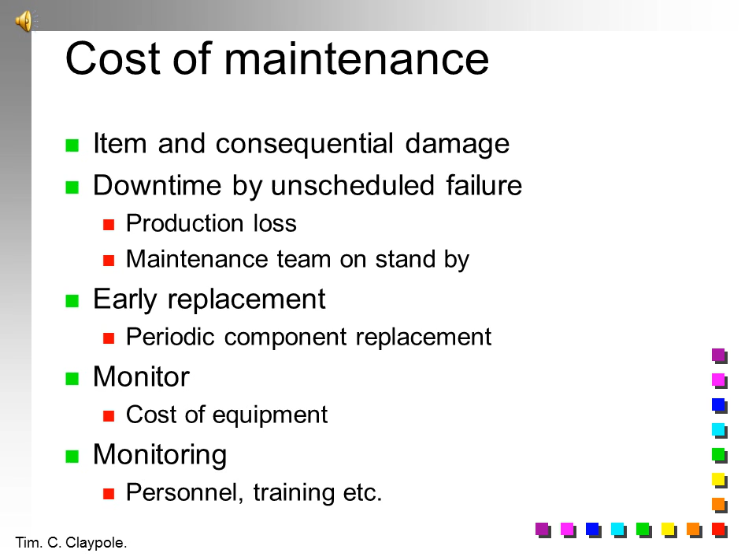Over time, with most companies, we'd expect to see them having a changing maintenance profile, if they're serious about productive maintenance and making their system more cost effective. Initially, most companies would rely on a breakdown maintenance approach - you run till it breaks and then you fix it. You then might move to a second stage, restorative maintenance - you have a certain amount of breakdown, but periodically you restore it to its original health. Stage 3 would be you start looking at replacement maintenance as well. And stage 4 is that you would start to have a combination of breakdown, restoration, replacement and condition monitoring.

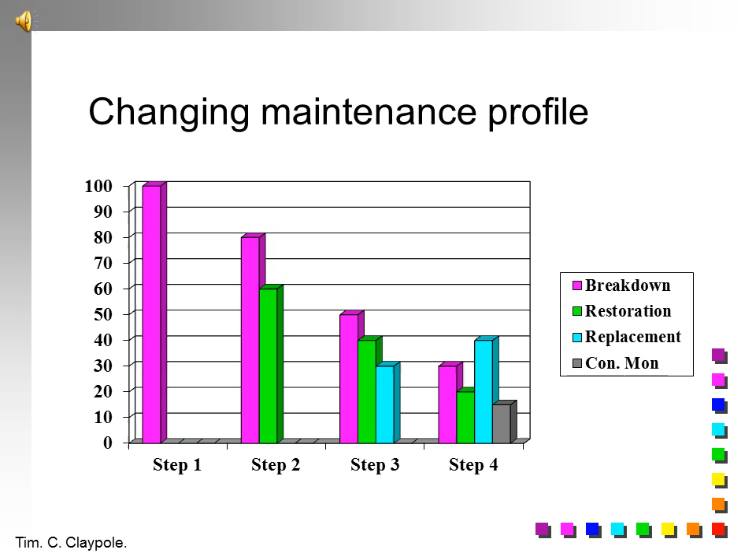So how do you end up deciding which of these you should use? You have to have a maintenance strategy, and the maintenance strategy depends on each element, deciding on the possible life, the failure consequences, as we've discussed previously, and the safety and hidden failures, safety and environmental, and the economic consequences.

So, for example, you might have light bulbs, which in an office you would have somebody come round periodically. You'd have enough light bulbs that if one failed, you'd just have a slight loss of light, nothing too serious. You have somebody come along and periodically change the bulbs as they fail. If, however, you've got a big warehouse and to change the bulbs requires you to scaffold or a crane, then you might decide that on one weekend you will change all the bulbs once so many have failed, because it's cheaper to put the scaffolding up and rebulb the whole of the bay area.

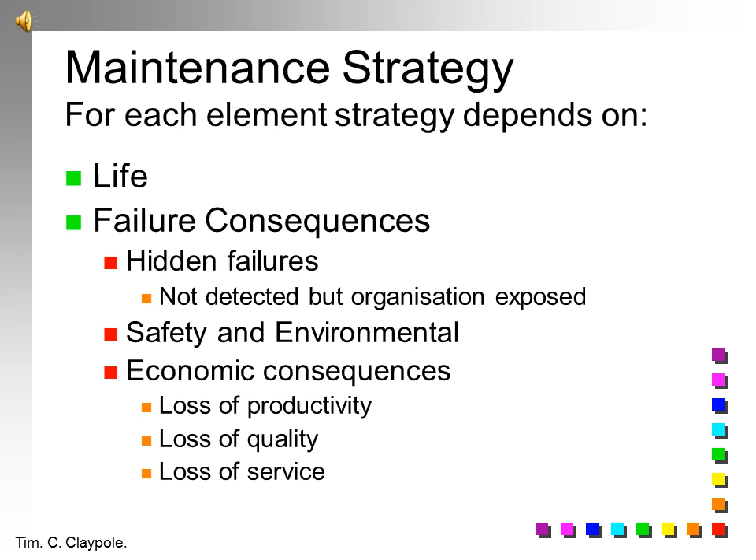You might decide that if you have a light in a dark stairwell, you have to have an emergency lighting system should the one fail, because it will be a health and safety hazard. So for each element you're looking at it to decide: do you use breakdown, replacement, or condition monitoring to maintain the equipment.

A few years ago we did a survey for the UK government looking at the benefits of a maintenance programme. We surveyed about 100 companies, went round and did individual interviews with their maintenance staff, and produced a report which I think is still the reference in the printing industry.

We asked people what they saw as the benefit of actually having a maintenance program. They said they had less unplanned stops. They knew when things were going to fail and were able to adjust their production schedule and plan accordingly. They were also more aware of their equipment performance and capabilities.

Quite interestingly, with a lot of the equipment, they have to use the original equipment manufacturer's consumables. But as they got and did their own maintenance program, they were able to identify the source that the original equipment manufacturer was getting them from, and buy a replacement of as good, if not better, quality. They also got to know which spares to have in stock.

In one example we were given, they had purchased a machine for folding and cutting paper, and the supplier company had provided a whole set of spares they thought would be needed. Over a 2 or 3 year period, this box of spares gathered dust in the corner of the printer's office. And yet they'd had to change components. Over that 2 or 3 year period, they worked out which components failed and had an impact on their productivity, and they then stocked those particularly so they didn't have any breakdown issues.

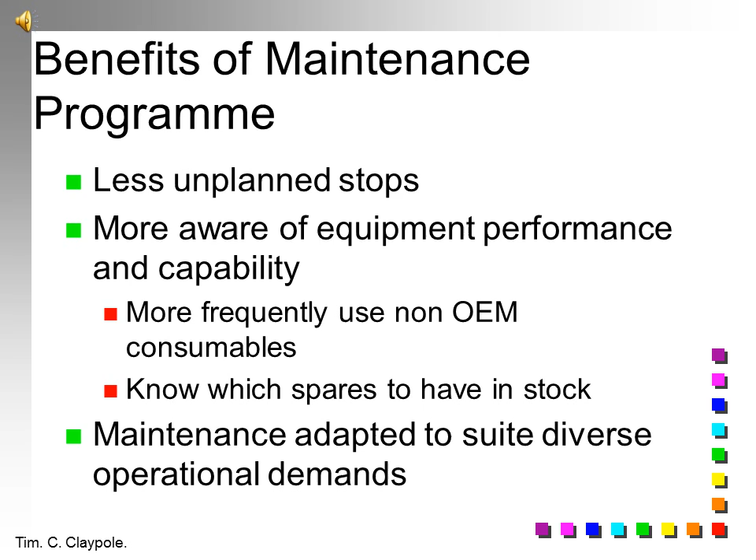Companies with a maintenance system and those without: we found that those with a maintenance system ran faster. But did they run faster because they had maintenance, or were they running faster and so found they had to have a maintenance schedule? Don't know. Which came first?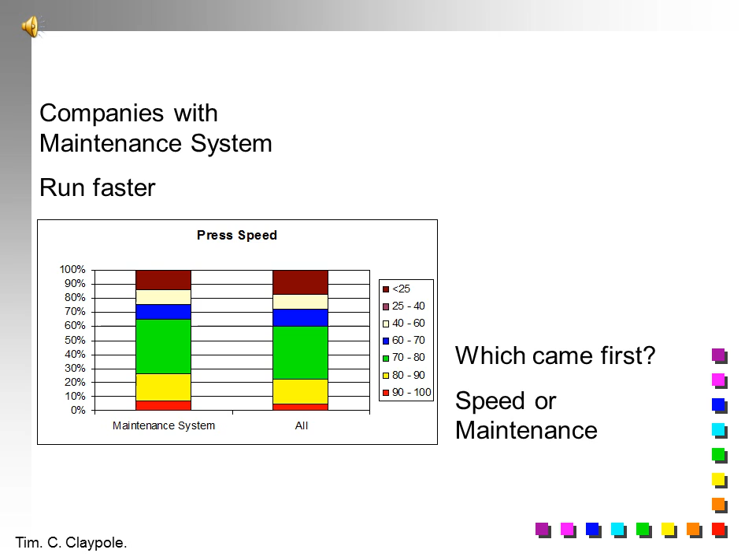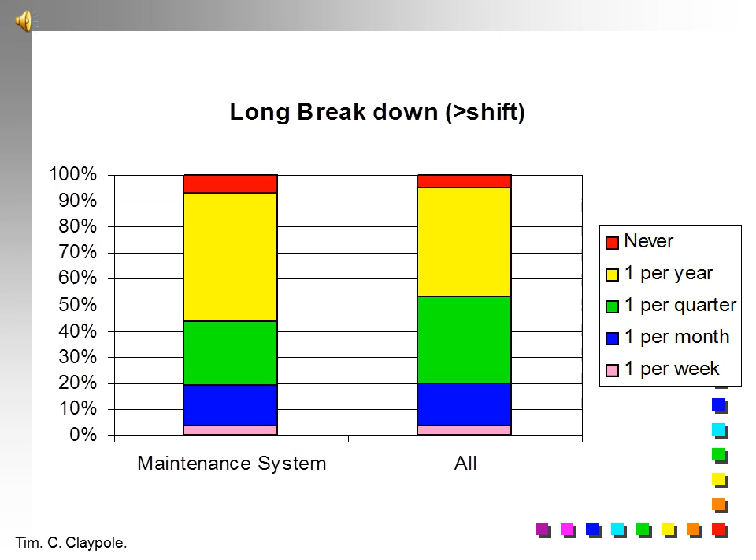What about long breakdowns? We specified this as being longer than a shift. For companies with a maintenance system, they had more times when they didn't have a long breakdown. Some of the companies reckon they never had a long breakdown, or at most one long breakdown per year, whereas all the regular short-term breakdowns for companies with a maintenance system were smaller, showing an obvious benefit.

The interesting thing is short stoppages. You could argue they didn't have any long breakdowns because they had a lot of short stoppages. If you look at the ones with a maintenance system, they had a short stoppage of 10 minutes to 3 hours every day. Perhaps they had that, but because they have a maintenance system, they were aware they were having these short stoppages. You have to question whether companies without a maintenance system actually knew how much stoppage they were having.

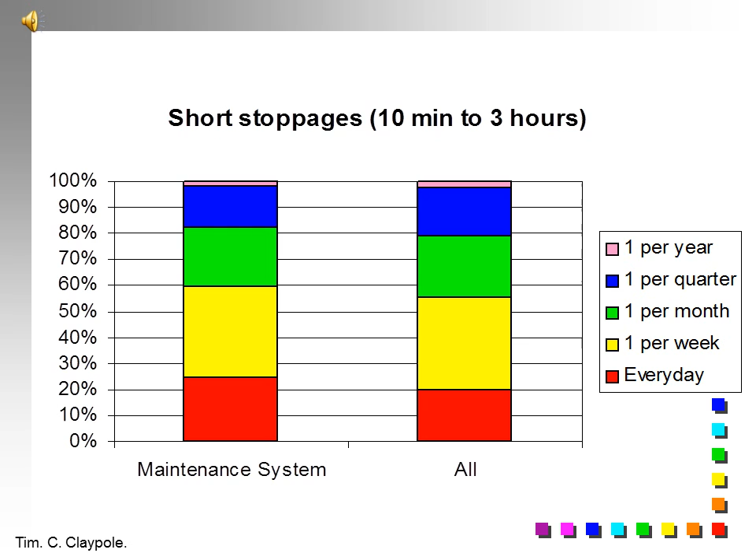A lot of the modern equipment is fitted with machine monitoring sensors. Those with a maintenance system tended to monitor them continuously, have them monitored by the operator, or use an external service. Those without a maintenance system tended to only look at the machine sensors when something went wrong, and you have to suspect they looked at the sensors to see who they could apportion the blame to, and whether they could actually claim the money back from one of their suppliers.

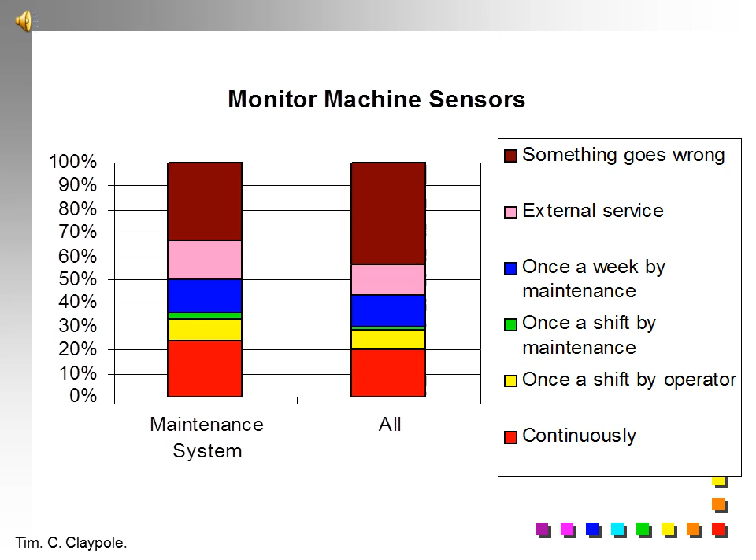Another interesting thing is the occurrence of following the manufacturer's maintenance procedures. The fact that some of those with the maintenance facility or system didn't follow the manufacturer's procedures at all is perhaps because they decided they actually understood the machine better and had worked out their own maintenance procedures. It's also that they don't do them precisely.

Again, they get to know their machines, they get to understand how often they need to do things. So in some cases, particularly those with a maintenance system, would do more.

I can give you another example from my Land Rover manual. It reckons that you should grease one set of joints once a month. Well, that's if you want to change them every 6 weeks.

Through regular use of the car, I worked out that if I greased the universal joints in the drive chain once a week, then I didn't have to replace them on a weekly or 6 weekly basis. The ones that are in there now are probably the same ones as I put in 10 years ago, because I've maintained them all the time. So I do more than the manufacturer suggests because I understand how the thing goes wrong.

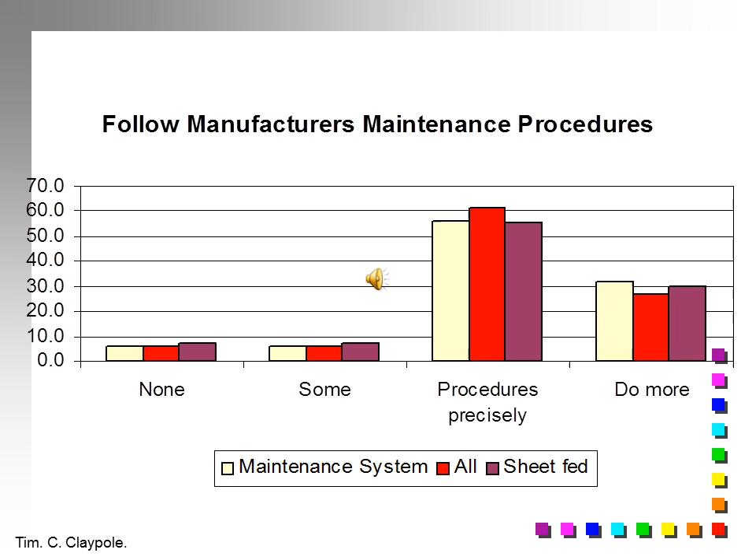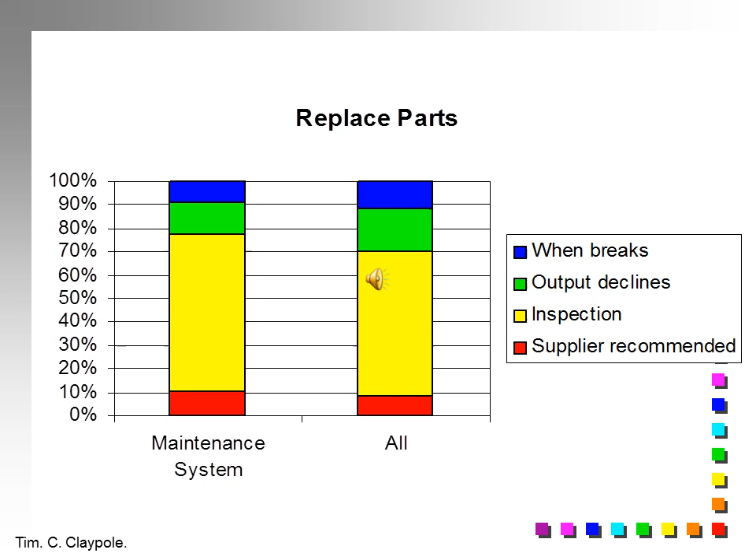How often do you replace parts? Those without a maintenance system, when it breaks. Those with a maintenance system, a lot of the time they replace them on inspection. Is this component looking like it's about to fail? We will replace it. So they're getting more use out of their components.

One of the key findings was that you should involve the operator in maintenance. This chart shows how important different aspects are. We asked the respondents to identify what they thought was most important. The most important thing was that maintenance had to be part of production. It wasn't something that was an add-on, it had to be integrated into production. One of the most important things.

You needed to do standard things like have checklists to make sure everything was done. You had to have standard procedures that everybody did things the right way. Sounds just like total quality and quality maintenance we discussed at the start of term.

You have to have a top-down priority. Senior management must support the maintenance. On one site we went to, if you wanted to take away a maintenance slot from the maintenance team, you had to have the signature of the managing director. It stopped the number of times that the production department, when they were running late, said, oh, we're not going to let you have the machine for maintenance. They had to get the signature of the managing director.

An important thing was matching tasks to skills. It's not the most important or very high, but it's important to match the skills of the operators to the tasks they were going to perform, or training them accordingly. It's interesting, it's one of the highest categories when you put it almost as high as being part of production, when you put both high and very high together. So it's one of the most important things.

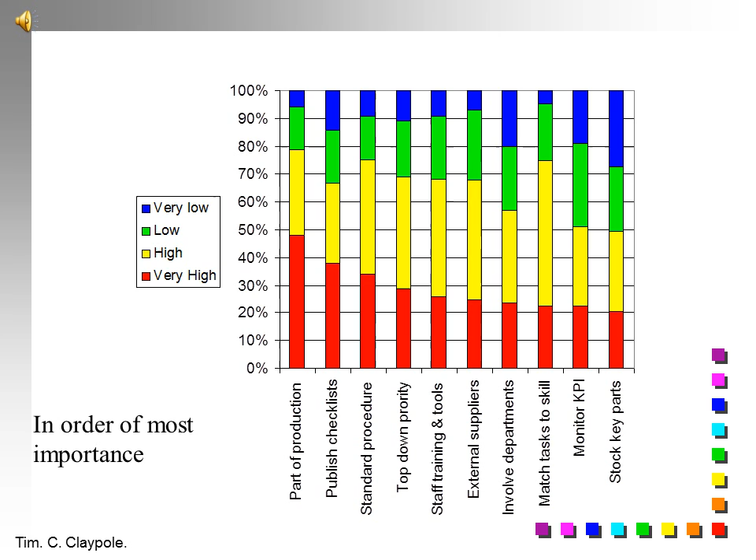So, what did we find from this study? The top priorities for maintenance: it has to be an integrated activity, planned in as part of production. It has to have priority from the top, senior management has got to support this. You have to have a good management system, publish checklists, and have standard operating procedures. It's exactly like the quality and management systems we've talked about already.

And you had to involve the operator, have operator-involved maintenance. You can have a maintenance team that goes round and checks everything once a week, but if you train the operator on what maintenance should be, they can check every day, every minute. So instead of having a small maintenance team, you suddenly have a huge maintenance team.

You need then to give the people staff training and give them the tools to do the job. You need to match the tasks they're delivering to the skills that they have. They need to know that at certain jobs they have to call in a specialist. They have to be given top-down priority. The operators in one plant that we visited had the authority to stop the production line if they thought the equipment needed maintaining.

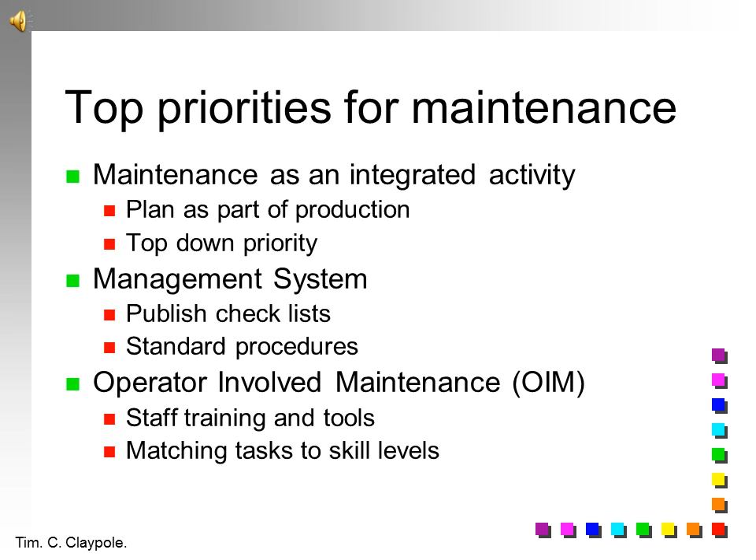So, for a successful maintenance program, it has to be an integrated activity driven by the need to improve. You have to have a management system and you have to involve the operators. So, I hope this section has given you insight into maintenance and maintenance procedures, age-related failures, and how they relate to other topics.